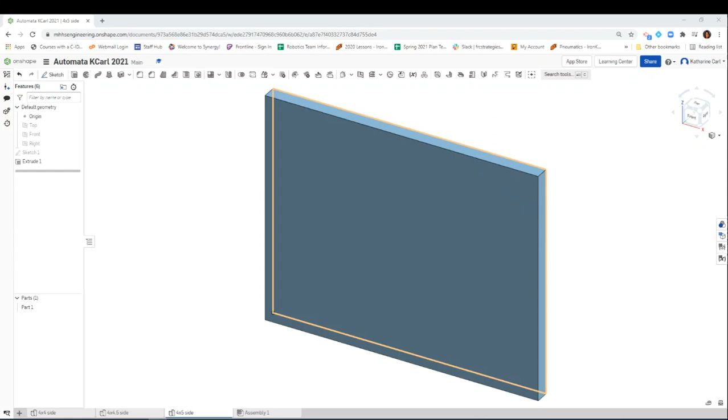All right, so in this video, we're going to go ahead and use the different sides of the automata that we made in Onshape, and we're going to actually assemble them together in order to make the box.

So I'm going to go ahead and click on the Assembly tab. And if you notice, nothing's in there currently. You need to go ahead and insert, and all three of those different sizes can be placed in. I tend to like to work on it one by one or in a smaller group, that way it doesn't get confusing with all the pieces in the view. So what I know is I have the 4x4s, which there are two of, and those are the two vertical sides on either side.

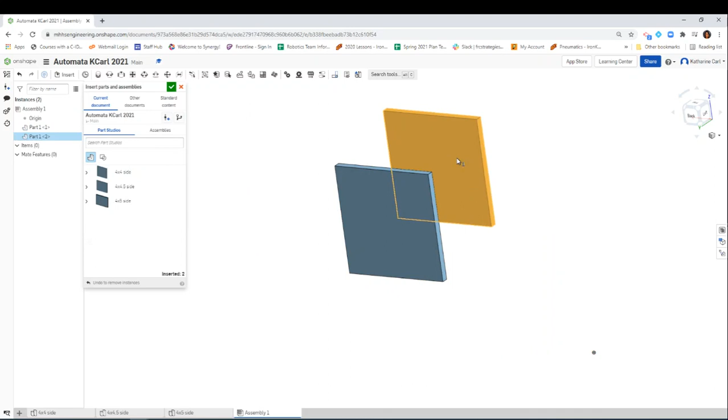So I'm going to click on one, place it in there, click on it again, place the second one in there. And then the bottom face of the automata box is this 4x5, so right now I'm just going to insert one of them. I'm going to go ahead and green check. I can always go back, which I will end up doing in a little bit, to insert additional sides to finish and complete the box.

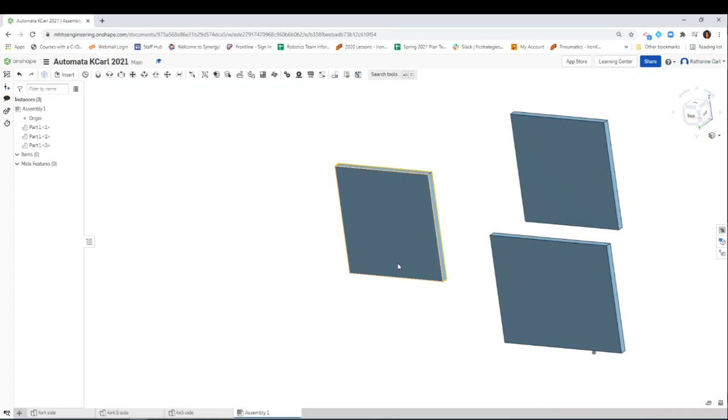So let's take a look at what we have. Right now we have the two sides and we have the base. And if you notice, they're not oriented the way we want them to be. That's okay right now, because when you start to add the constraint and the mate features, it will cause them to move.

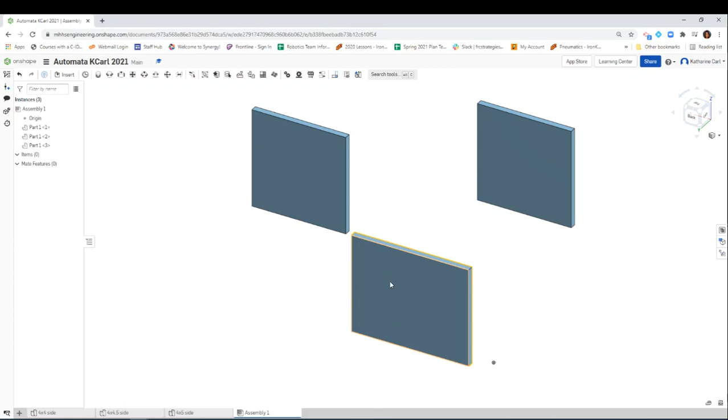So the first thing is I want to place and constrain the base piece, which is this one. Again, if you notice, you can rotate it if that helps you visualize it a little bit more. This needs to be here. I can even type in 90 degrees and hit enter. Now it's nice and flat so I can see it.

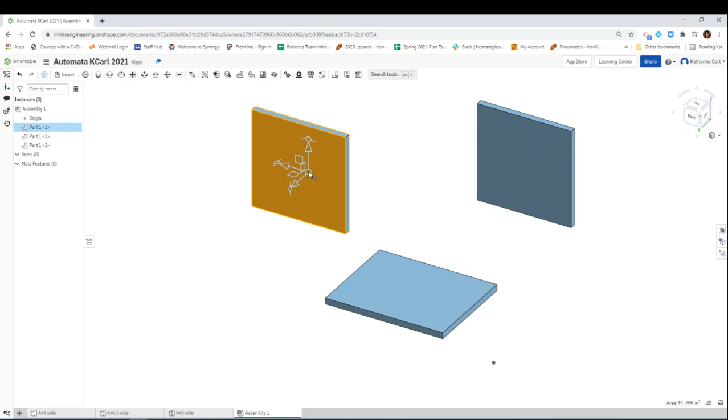All right, the next thing, I can go ahead and click on this one. I need to rotate it this way, 90 degrees, so that you can see it. Click, hit enter, there we go. And I'm going to do the same thing with this one. I need to rotate this about 90 degrees, hit enter, and there you go.

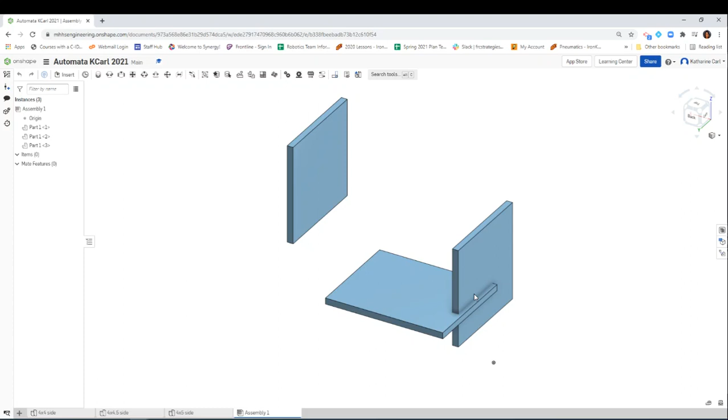And these are eventually, once I constrain it, one's going to be on one side and the other one's going to sit on top on the other. But before I constrain those, I need to place the bottom, and I need to constrain this.

So I'm going to use this fasten mate. Click on fasten mate. The first edge I'm going to click on is actually the origin, that center dot right there. So I'm going to click on it. I'm going to make sure that mate connector, if you can zoom and see it, is horizontal. Okay, so click to make it stay.

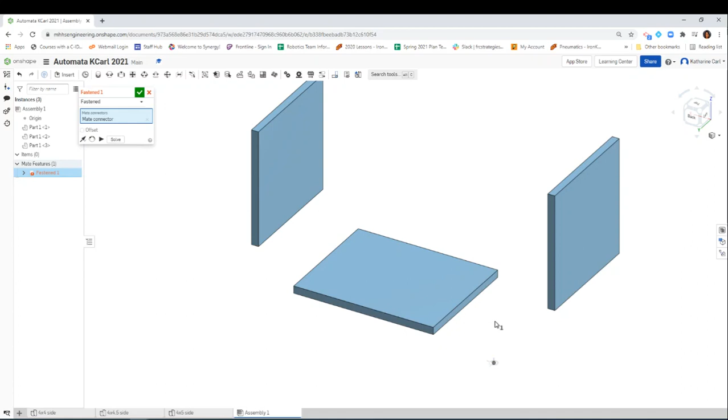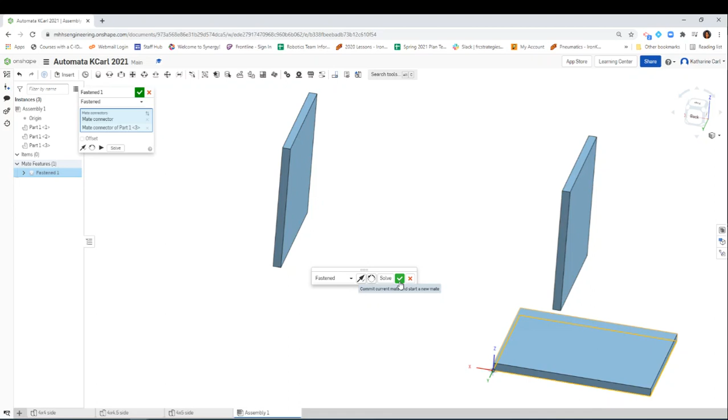I'm now going to rotate this, and I would like that horizontal mate constraint and mate connector to be on the bottom face, but I'm going to move my mouse so that mate connector goes to the corner, and click to make it stay. If you notice, that's in the right spot that I want it. If I needed to flip it, I could use this or even flip that axis, but this orientation looks great. So I'm going to click to make it stay. And if you notice, if I try to move it, I can't — and the reason is because of this fasten mate that we added.

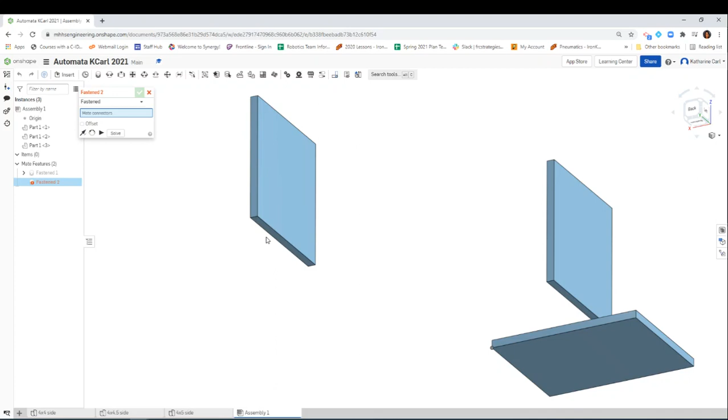All right, so let's go ahead and add the two sides. Similar idea — I'm going to click on this fasten mate because you guys are also going to be using glue, right? So they're not going to have any other degrees of freedom. I'm going to click on, and I'll have to zoom in, the bottom face, so make sure it's all outlined in orange.

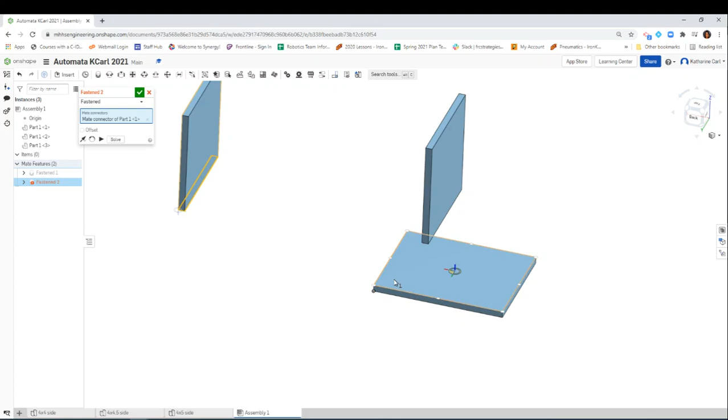But I want to move my mouse not to that corner, but to this corner right here. The reason being is I have to line that up with a mate connector on the base plate. If you notice on this base plate, if I move things over so you can see, the only mate connectors, those little discs that show up, are either in the center, on a midpoint, or at a vertex. So I'm going to make it connect at this vertex, which is why I clicked on that outside corner. All right, so I'm going to make sure it's horizontal too. There we go, click to make it stay, and there you go.

Constraints again - you could always keep flipping if it didn't flip the way you wanted it to, and there we go. Or this way, but we want it to go up. So click to make it stay.

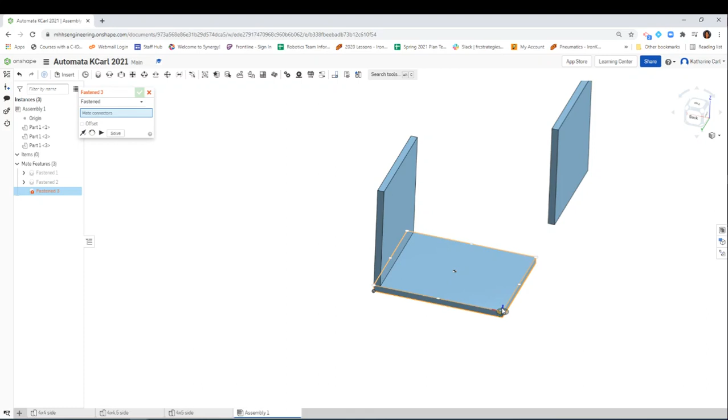I'm going to move this one out of the way a little bit, and I'm going to do the same thing on the other side. I'm going to make sure I click on Fasten Mate. I'm going to click on this - I'm not clicking yet, I'm hovering over the top face, and then make sure the mate connector is in the corner.

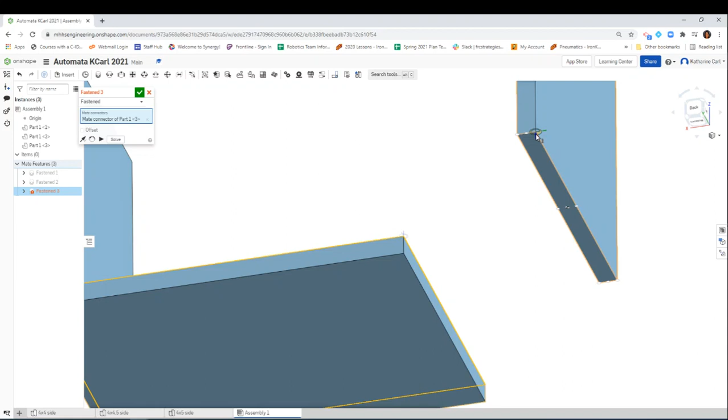Click to make it stay. And then I'm going to go over to our other side. I'm going to zoom in and make sure I'm outlining the bottom side, and go over here to this outer vertex or corner. Click to make it stay, because I want those vertexes and those mate connectors to line up. That looks good - I'm going to green check. There we go, so far so good.

You can kind of check it out, try to move things. I'm going to close this for a second. Try to move things and it won't move, and it's moving in the right direction.

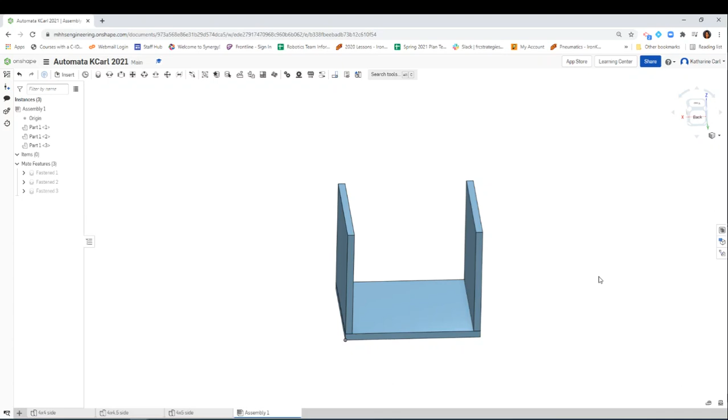So now we're going to add the 4 by 4.5, which that piece is going to go kind of in between these two vertical pieces, so it's going to be the third vertical piece. I'm going to insert this 4 by 4.5. Click once to make it stay. Click a green check because I'm done inserting for now.

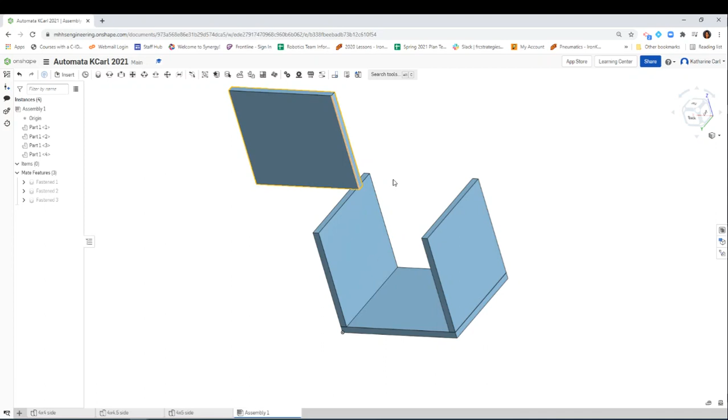And if you notice, the orientation that it's in is actually kind of great. Now I'm just going to go ahead and click on Fasten Mate. I'm going to click on this face, the top face, right? But I'm going to click on this midpoint right here. Click to make that stay.

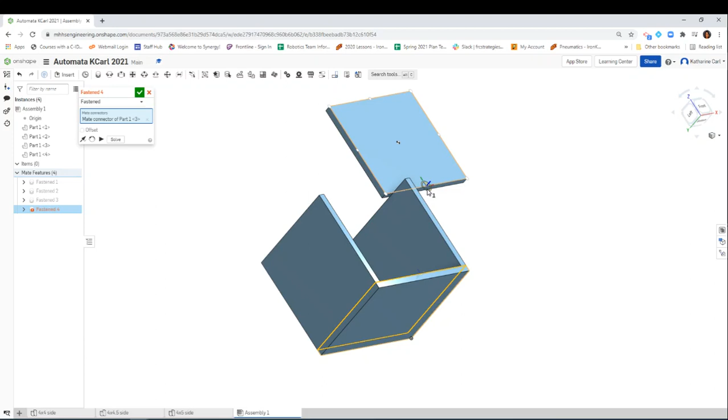And why is that critical? Because now I'm going to rotate it so that I'm clicking on the bottom face, not that one, because the mate connector is vertical. I want to zoom in because I want this skinny bottom edge - make sure the whole bottom is outlined in yellow, as you guys can see. And I want to go again to the outside midpoint. Click to make that stay. And let's zoom out to make sure that we see it correctly.

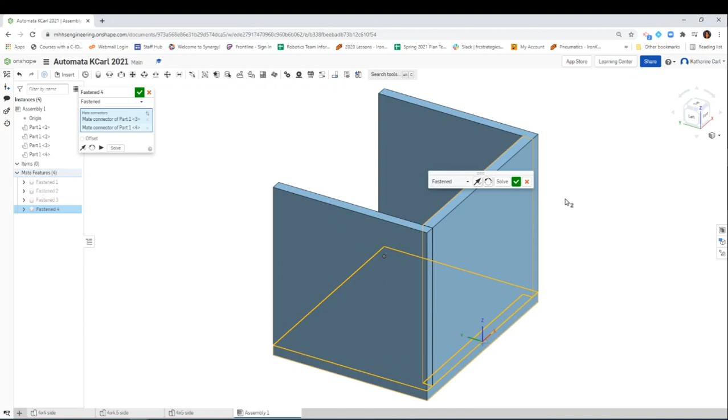Ooh, looking good. All right, so go ahead and click on the green check. I'm going to go ahead and close this window. I'm going to rotate it so that I can make sure nothing moves and it's assembled properly.

Awesome. So now we just have to insert one more 4 by 5, and that's going to be placed on top. So green check, right? Because there's a 4 by 5 on the bottom. Now we need the 4 by 5 on the top.

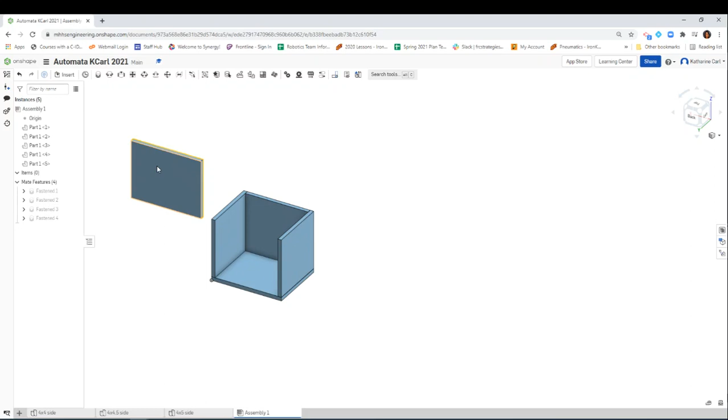And if you notice I don't have any holes in there right now, don't worry, there will be. Sometimes it's nice to kind of start to assemble it together so you can understand what shapes you're working through. Obviously this is a little different than how you would actually build it, because when you build it, you're going to know the locations of the holes that you need to drill out based on completing this model.

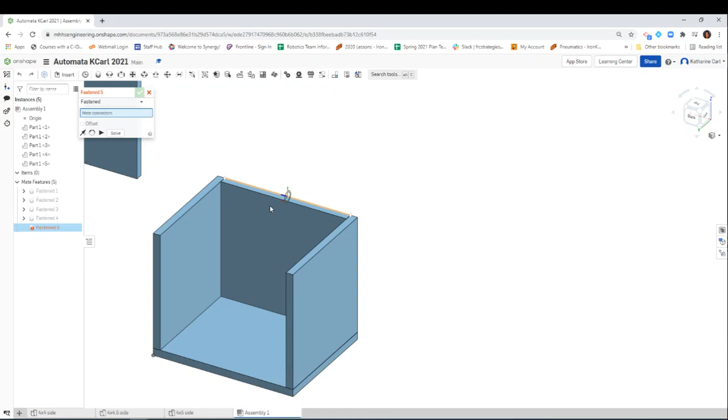Okay, so now let's go ahead and fasten the final side. I'm going to click on this Fasten Mate. I'm going to go ahead and zoom in because we would like it to be on, let's just say, this top face right here, but the corner. But I want to make sure that mate connector, which is that circle, is horizontal, okay?

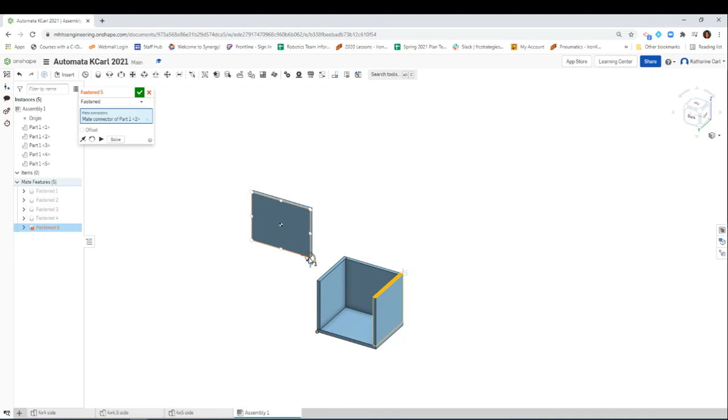So that's where you got to be real critical with your eye. There we go. And now, if you notice, I'm not rotating it - that's fine. I'm going to go ahead and, ideally, it has to line up with this face, right? And I'm going to click on this corner. And what that should do is flip it down, okay? So here we go, click to make it stay.

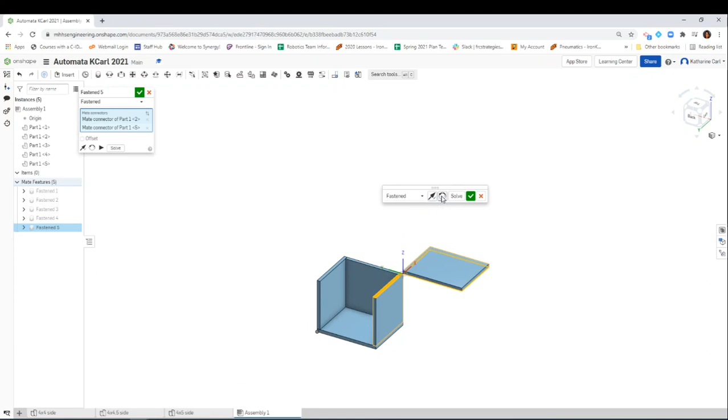Awesome, it did, but it's still not quite right. So I'm going to go ahead and rotate it and spin it around that axis. I'm going to click spin, spin, spin. Awesome, one more spin, but it still didn't work. Let's see if I flip it the other way. Now I can spin - yeah, there we go.

So do you see how you can use these two tools to kind of make sure that it's orientated the way that you need? And that looks good, so green check - we will keep that. I'm going to close that because I don't need another Fasten Mate. And our box is complete.